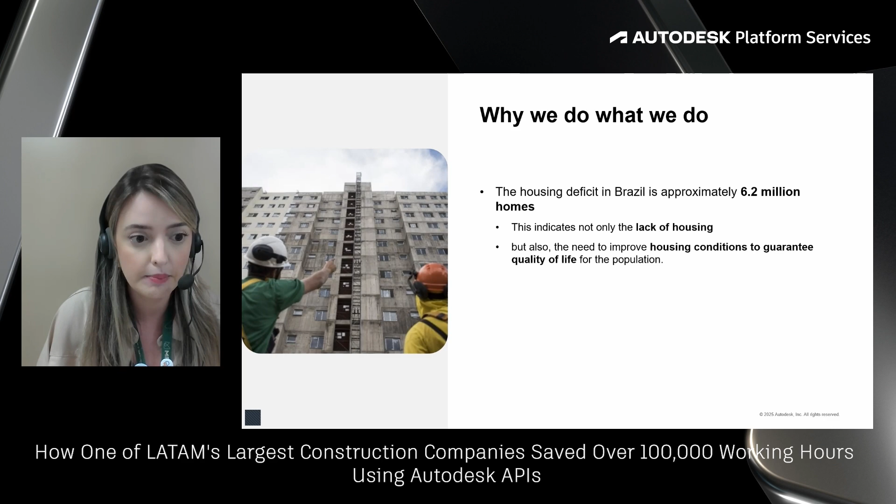Brazil needs over 6 million homes. Millions of families live in bad conditions. MRV's mission is not just to build houses, but to give people good, low-cost homes and better lives. We build the dream of owning a house. But building houses alone is not enough. We had a bigger question to answer.

We believe in the transformative power of a home. It's where individuals, families, and communities begin to dream, achieve, and shape a better world. Our brand reflects this commitment. We don't just build structures, we build dreams that change lives.

Founded in 1979, the MRV Group is now composed of 6 companies. Besides developing housing for Brazil's low and middle-income population, we also operate in land development, rental solutions, and we have a subsidiary in the United States named Resia. In addition to making the dream of home ownership a reality for thousands of Brazilians, we generate over 6,000 jobs annually in the cities where we operate.

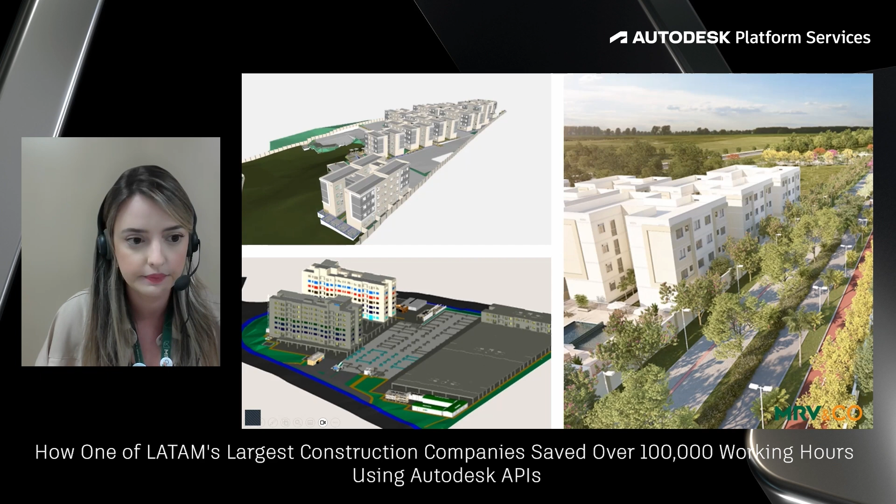We have a diversified product portfolio including low-rise buildings up to 5 floors, single-family homes, and high-rise towers up to 22 floors. Since 2019, all of our project designs have been developed using BIM. And we also use BIM to track construction progress on site.

To see our size: 500,000 homes built, 240 sites working at the same time in over 120 cities. Today, 1 in every 142 Brazilians lives in an MRV home. Of course, growing this big also brought new problems.

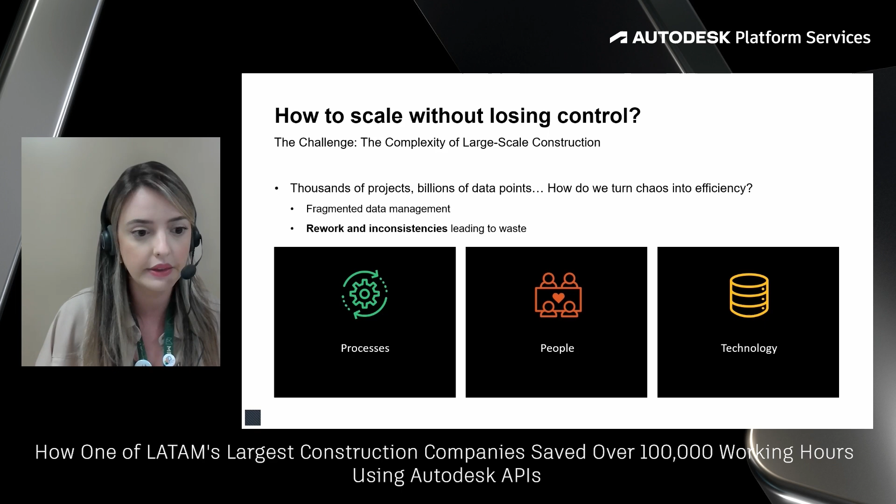Thousands of projects, billions of data points. How do we turn complexity into efficiency? We are facing fragmented data, inconsistent quality, and excessive rework. It was clear we needed a smarter and more structured way to operate. So we asked ourselves, how can we scale without losing control? The answer: well-defined process, engaged people, and the right technology to accelerate results.

BIM became the heart of our digital change. It gave us accuracy, standardized ways of working, real-time data, and strong teamwork. And with BIM, our decisions become smarter and faster. We moved from messy spreadsheets to smart BIM models. Now, planning, tracking, following rules, and managing are part of our daily routine.

Our workflow can be summarized as: number one, data-driven decisions. Unified models provide accurate forecasts and real-time insights for better decisions. Number two, precision and standardization. Integrated models reduce inconsistencies, minimize rework, and ensure quality.

Number three, active collaboration across teams. Improved information sharing and teamwork boost communication and project visibility. Number four, traceability and governance. All actions are logged and traceable in one source, ensuring compliance and quality.

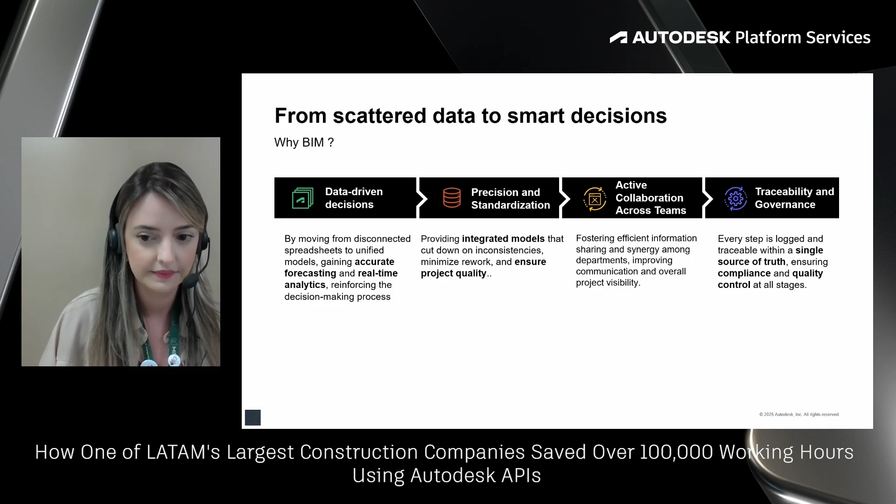But this journey wasn't easy. It all started in 2014 with the first pilot project. Each year, we've increased the number of projects and sites using BIM, while also growing our team and improving our maturity with the methodology. Each year, we got bigger and stronger.

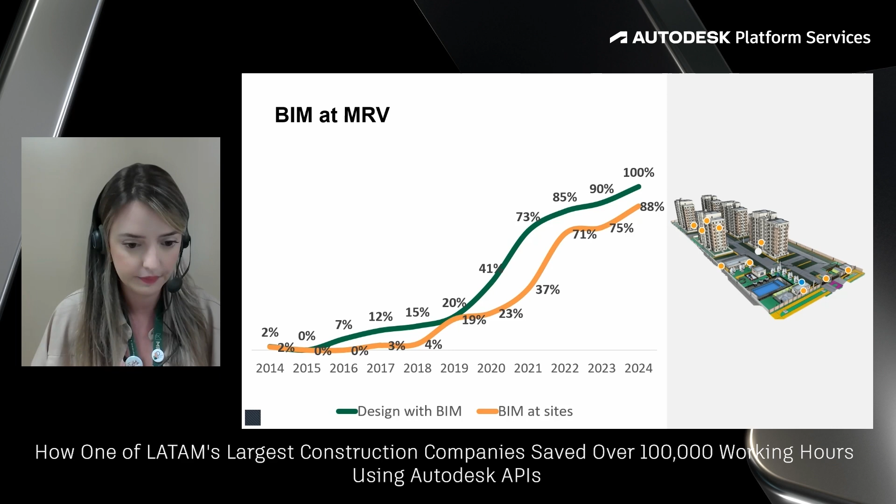Our BIM journey has now lasted over 10 years. Now we are 15 people dedicated. We trained over 2,000 people and handled 1,200 projects on Autodesk Construction Cloud. Still, we had to overcome many challenges along the way.

At the beginning, there was resistance to change and communication was challenging. We knew we had to show quick results to keep motivation high. We focused on change management, asking how can we foster a digital culture and adopt new technologies. Clear communication was the key. How can we translate innovation across all departments?

We understood the need for fast results. The challenge was, how can we show quick wins to sponsors and stakeholders? We set clear objectives with sponsors, created workflows to communicate results, and listened actively to teams to understand their needs. We also mapped process and requirements to ensure alignment.

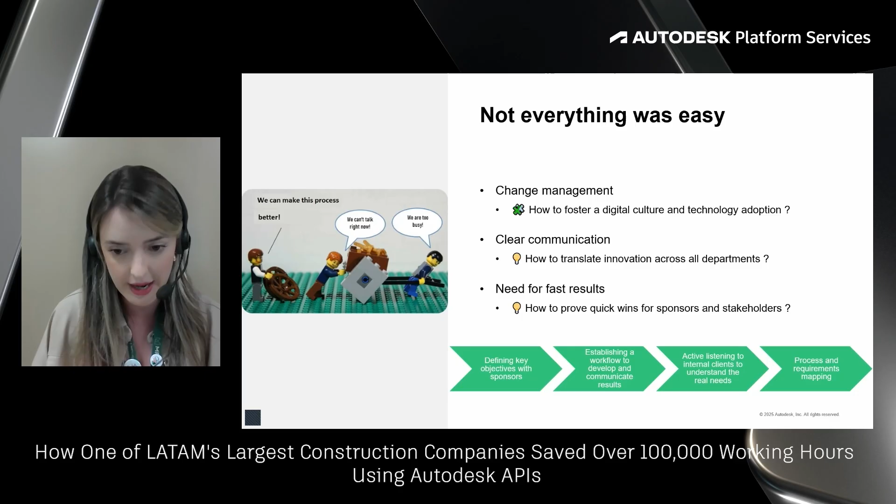Now it's Gabriel's turn. But how could we bring fast results with BIM and show quick wins to our sponsors? Through automation.

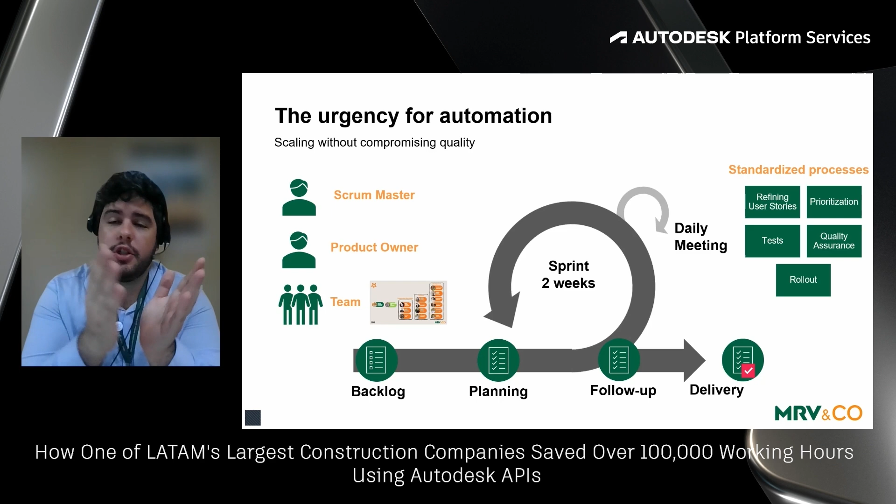This was one of our main pillars in the BIM implementation in MRV. To scale without compromising quality, automation became crucial for efficiency. We adopt Agile methods, aligning clear objectives with rapid delivery cycles, ensuring immediate results and long-term sustainability.

According to the Scrum methodology, we established key roles and rites to keep the flow and work in standardized processes. We established the role of Scrum Master, Product Owner, and the developer team. Each of these roles have standardized procedures and activities throughout our cycles, our sprints of 2 weeks.

Since defining the features and refining user stories in our backlog, to correct prioritizations in our plannings, to standardized development steps and rollouts across our sprint. The planning is the beginning of the sprint.

We go through the backlog to understand the needs of the clients, run refining processes, prioritizations, and across the whole sprint, we develop the product, test, provide quality assurance, and roll out it.

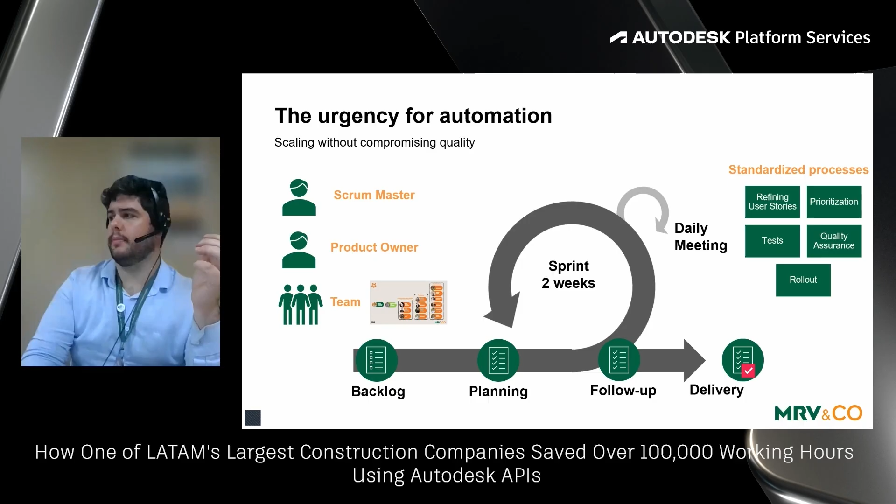Going deeper, to our team, we are right now 15 dedicated people in maintaining and deliver new processes and automation.

The process team has a key responsibility to be in touch with all the design teams, map and establish information requirements and needs of the other departments, translating to the development team these needs into new possible products.

And the dev team owns the expertise to create and build the automations. They have the responsibility to manage all the creation, test, and deliver of the new products.

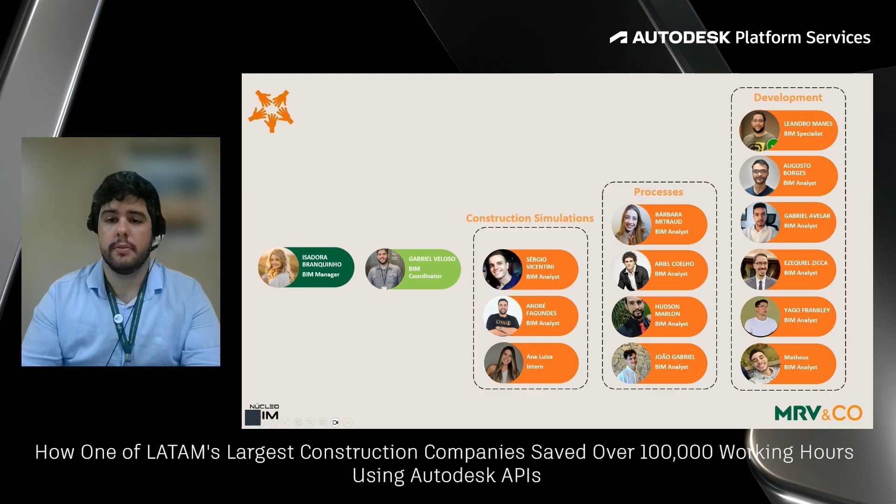Considering the whole development process, we established several activities that are key to ensure quality and efficiency to the process. The first step is establishing in the beginning of the year, in the beginning of each sprint, our process and needs mapping.

Aligning objectives and key results to establish our goals, the team goals, but also understanding other managers' goals and the whole organization objectives for the year to align the expectations with the other departments.

From these general objectives and mapping of the needs, we start defining the scope of new automations. We have a standardized procedure, standardized documentation to write down those needs.

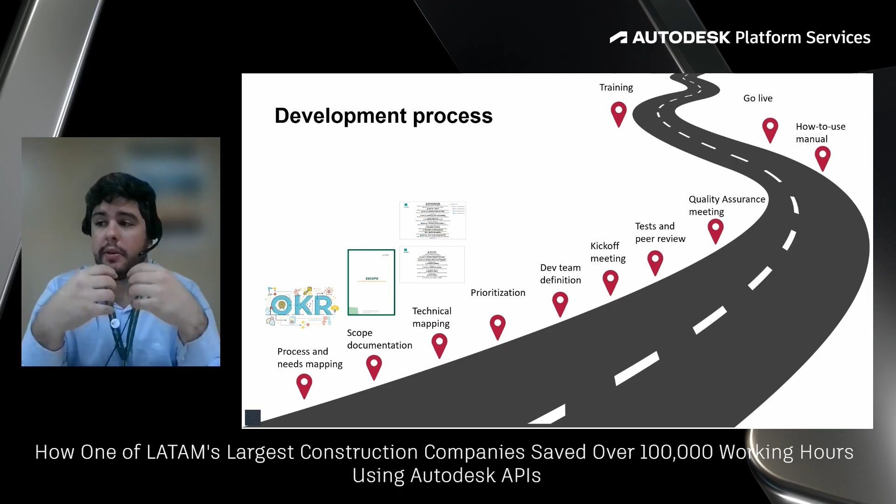From this scope, with the perspective of the business, we start a technical mapping, when our developer team bring their own expertise to refine the features and products with their expertise from the technical point of view.

If we go deeper in our technical mapping, we have several answers to respond across each level of refinement. We use Azure boards, and we have descriptions and answers standardized to provide for each feature and user story MVP that we're gonna make and deliver.

As an example, for this high level of feature structure, we need to well define the high level description of this idea or this solution. What will be new for this different product once implemented?

Who will use it? This is one of the most important answers. Who are the personas that will be used? How we're gonna reference them and bring the perspective of our internal clients to the product.

Why is it important for the user? How can we engage them in the process, and how can we engage them in using the product after that?

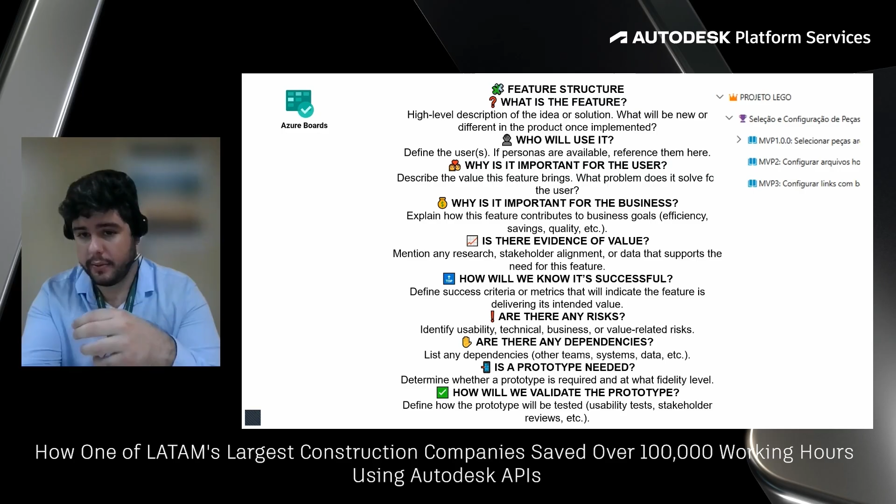Are there any risks? We need to map and manage all the risks throughout a project. Usability risks, technical risks, business and security risks, or any value related risk. Are there any dependencies with other systems, other products that we are developing, other teams, and so on?

And to prove the value, to understand how we gonna evaluate the MVP and so on, do we need a prototype to show the value, to understand how we're gonna build the product, and how we will validate this prototype if it needed?

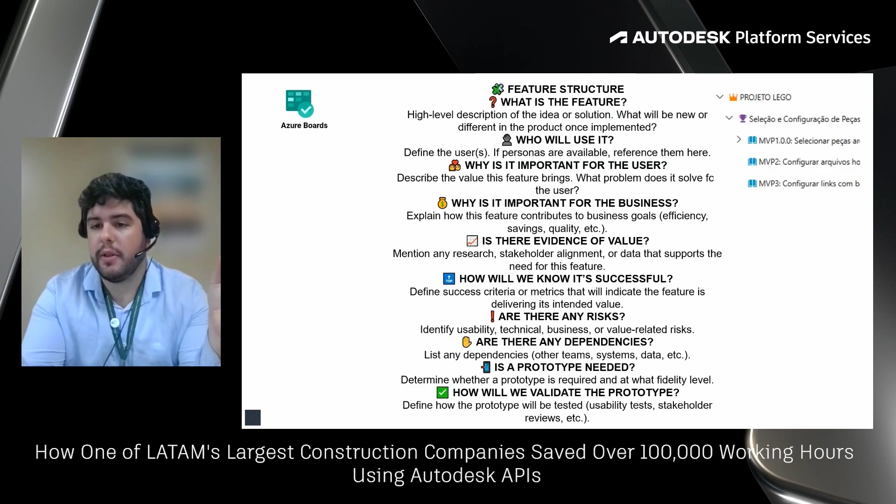In a lower level, we break down the features into user stories, which are our MVPs, which are what we prioritize and develop in each sprint.

And here we bring even more the perspective of the user, the persona that we need. As a key user, I want to use to automate this process to bring this value.

So again, we go deeper in understanding the pain points of our designers, our analysts, revisers, and so on to automate these processes. And again, understand one more time what are the benefits for the business to prioritize correctly the sequence of development of a feature.

Again, we need to bring evidence to support the development, list technical documents, insights, benchmarks, or related tools supporting the story.

Also, we need to understand the rules and acceptance criteria, defining functional rules and what must be delivered for the story to be considered done. Defining metrics and impact, KPIs or indicators that can be affected from the improvements this feature will bring. And also, we have technical details, system areas that will be impacted, maybe suggested tables or components to be created or modified in this development.

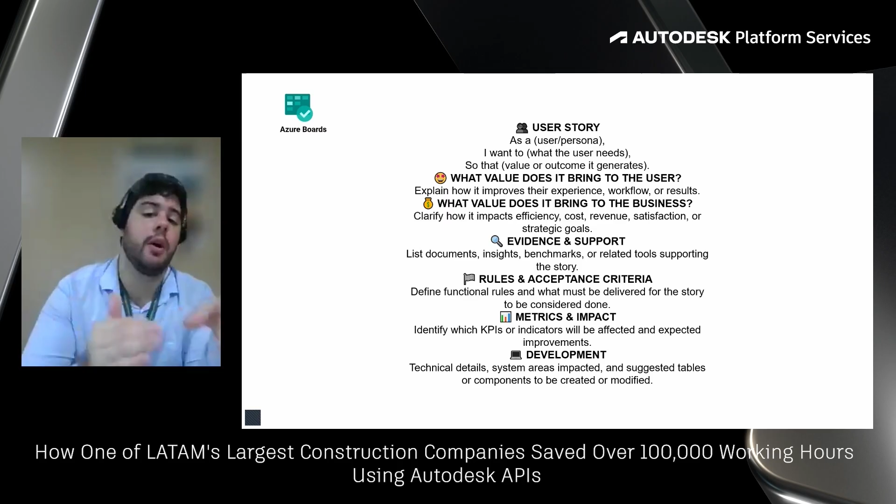So here are the answers that we have to write down before starting a new development.

With our scope documentation and technical requirements, we are able to do a correct prioritization in our plannings. We tend to prioritize what provides more benefit for our internal users and for the business, and of course, what is simpler to develop and bring quick results.

With the MVPs defined in our planning, we establish which dev team will develop each of those features and user stories. With this team definition, we have a kickoff meeting with the dev team, the process team, and other stakeholders to announce that we're going to start those developments.

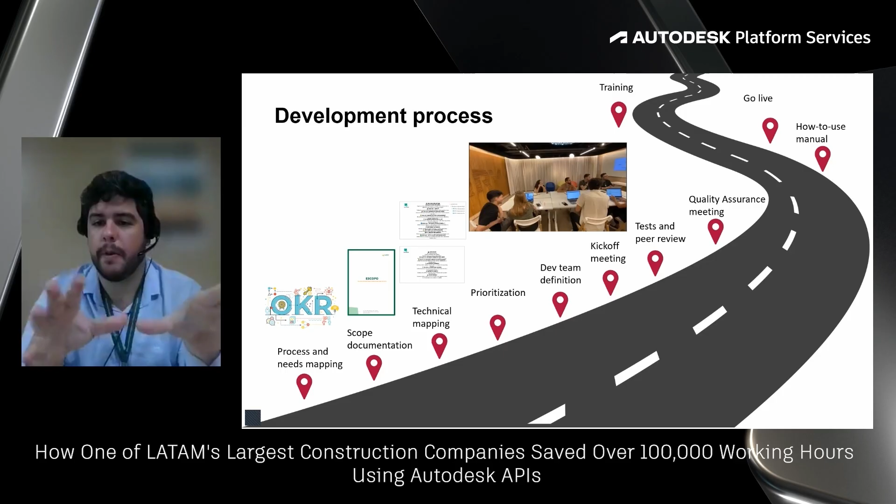And after the first development is done, we start tests and peer reviews inside the dev team. If it's all okay, we move on to a quality assurance meeting with the other stakeholders, our key users, to evaluate the development and validate that from a business perspective it's also okay, and that we are achieving the acceptance criteria.

With this stamp from the business side, we start the process to write down a how-to-use manual, bringing again the user perspective on how they should use that product.

With all these steps done, we publish the product in production, going live with it. And in some cases, we do specific training with the teams that will use these applications the most.

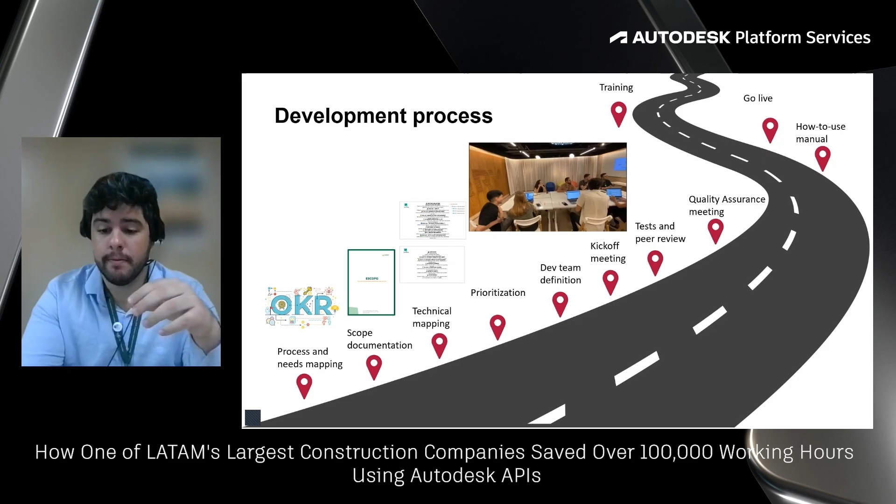Here, a small video of our team in our office, in our daily routines discussing ideas, and in a collaborative way prioritizing the needs and establishing the goals of what we're going to develop.

Here, our current number of uses of our products and the level of plugins that we already developed, which we're going to go deeper into in the following slides.

From this perspective of our processes, I'm going to tell a story, going throughout the roadmap over the years, showing you how we reached this point.

Going back to 2020, in our era with no ChatGPT, way less tutorials, we started our journey with only one dedicated developer, and also Jeremy's blog to guide us through this whole sea of the Revit API.

At this point, it was the beginning of everything. We didn't have standardized procedures. We were discovering the way that BIM automation could bring benefits to MRV. In this year, we already developed over 10 plugins for Revit.

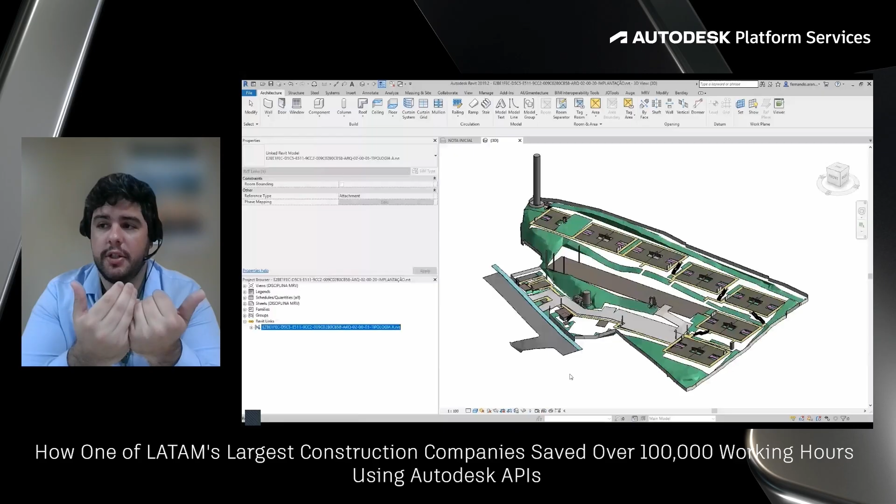As an example, here one automation that we developed back then. At this moment, we ran commands in Revit that were working with simple geometry transformations and simple calculations, simple user interfaces, as you're going to see in this plugin, using Windows Forms, exploring the potential and showing quick results.

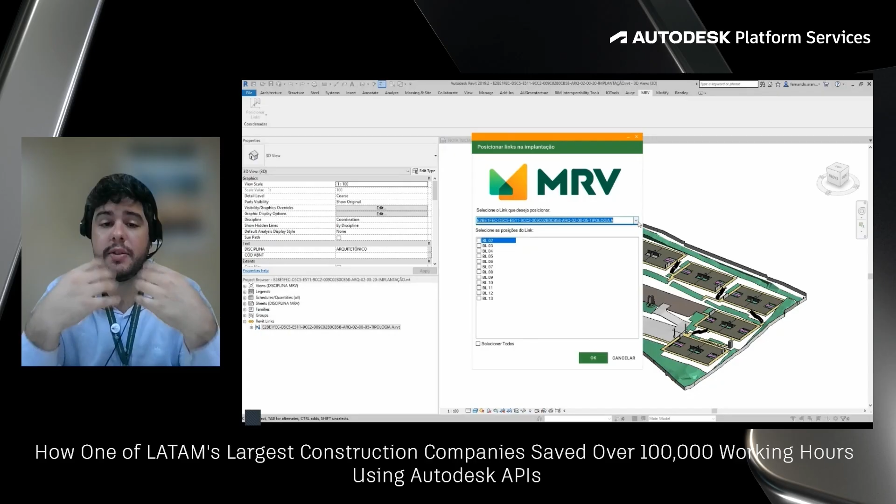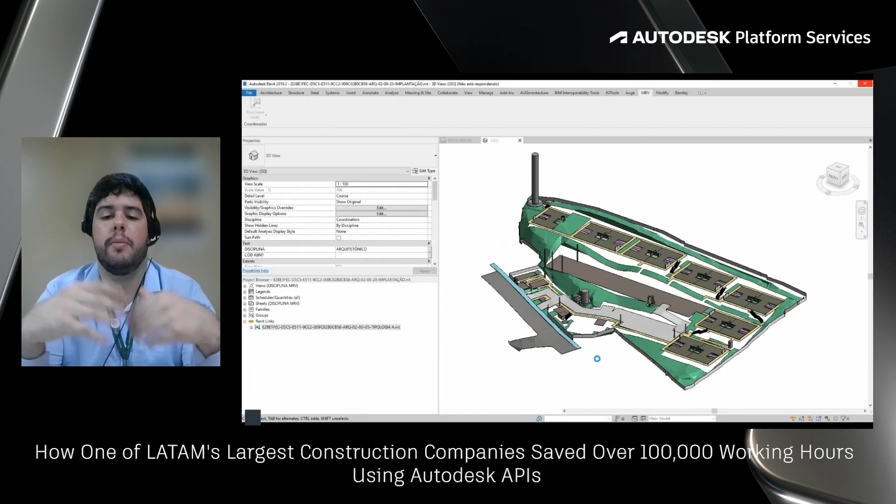In this case, we have this plugin, which selects a Revit link type and its positioning on site. We used to use a small Revit family to define the references on site, and with the project base point of each Revit link type, we managed to calculate the positions that each Revit link instance, representing our buildings, should be positioned on site, as you're going to see after the calculation of the coordinate transform.

In 2021 and 2022, after showing the possible results and capabilities that we could bring with automation, we started establishing workflows and proving the value of these functionalities. A key point of this milestone was to increase productivity of the team, establish those workflows, and bring better results.

One of the main aspects to prove these results was to start collecting logs to understand the usage of our plugins. We could assess that over these years we had 37,000 uses for those plugins that we were starting to develop. With this data, we could prove the value that this team could bring.

So we could, with our sponsors, increase this team and start new types of developments.

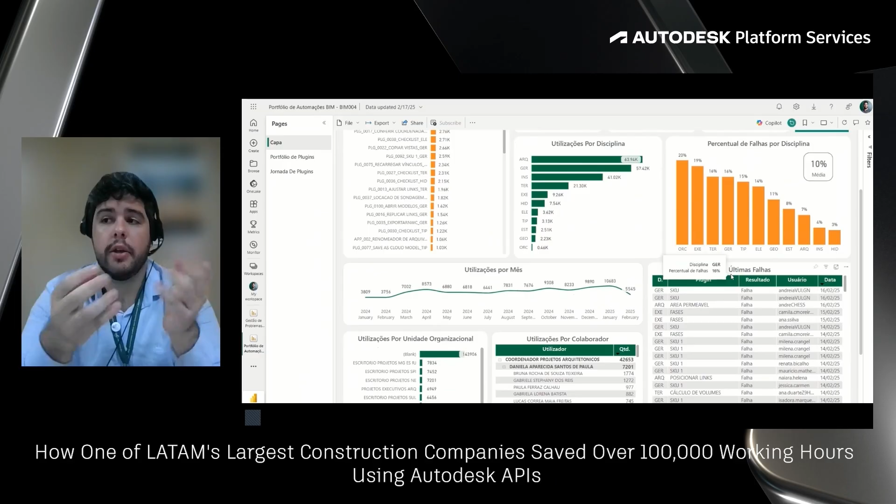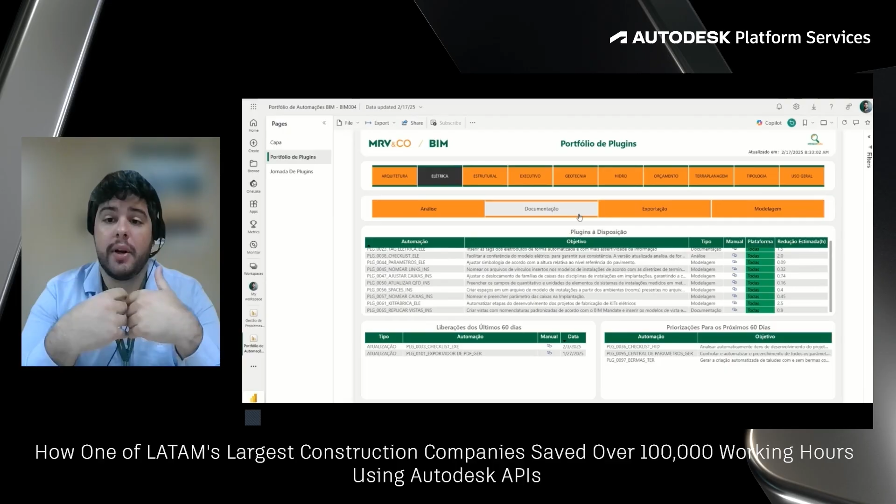As you can see right now, with this data from the logs, we could manage to develop a Power BI dashboard in which we could analyze the automations that were being used the most, the design disciplines using them the most, and the possible failures. It was also a huge portfolio of our automations, in a way that our users inside the company could see the whole package of automations available to them, and it showed them, at each step of the design, what type of plugin they should use at that moment.

So here we could increase our capabilities to generate insights for our prioritization and generate metrics of the uses that could guide us throughout the years, establishing the path that we should follow to increase our usage.

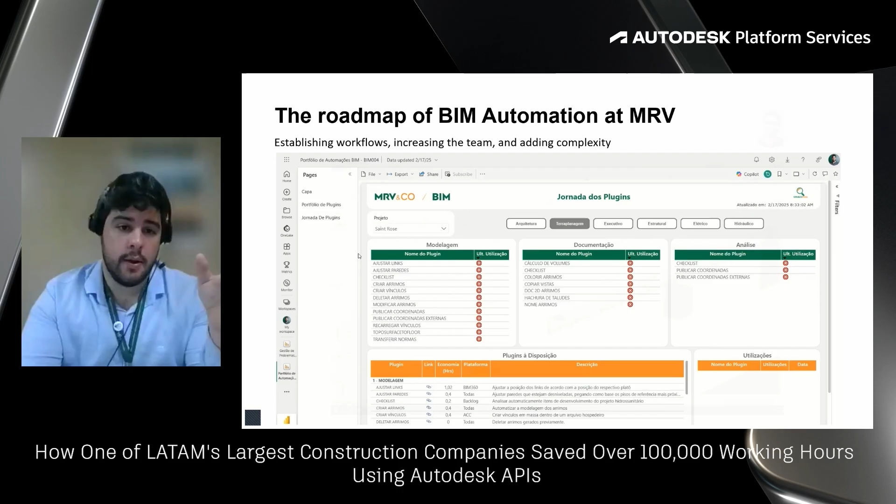At this time, we also increased complexity in our plugins, from the commands themselves inside the Revit API, but also from the user interface perspective, bringing new technologies, organizing the code architecture, and increasing the complexity.

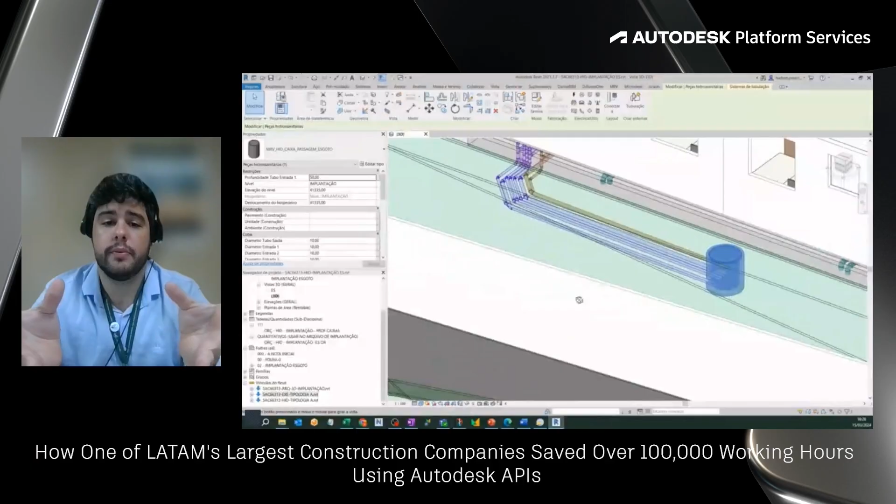Here in this example, this plugin enables a calculation to define the optimal path to connect pipes and plumbing equipment on site, respecting internal technical definitions and national standards.

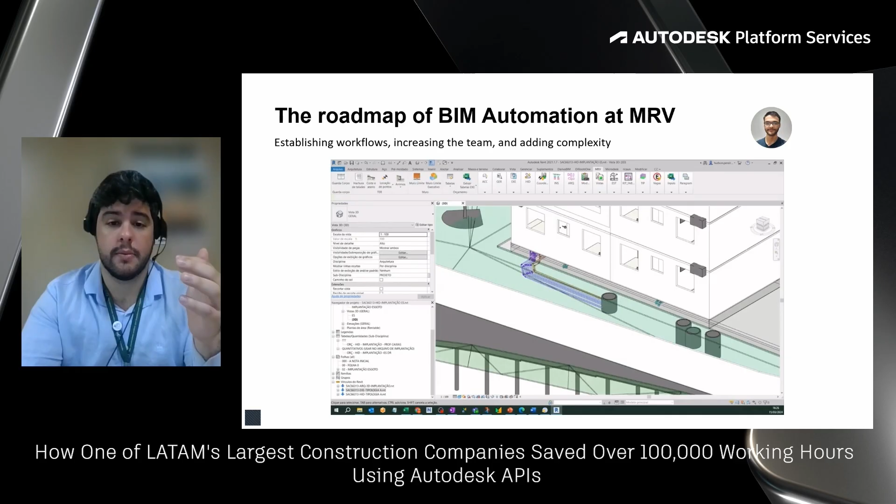Another huge milestone for us was in 2023, the migration to Autodesk Construction Cloud. It enables us to start thinking about a new set of capabilities to our automations. The migration of our projects to a cloud-based solution, such as Autodesk Construction Cloud, enabled us to run data extraction processes across multiple projects. As Isadora already told, we have right now over 1,000 projects in ACC. So imagine the volume of data, and this capability brought to us a huge set of opportunities.

Another perspective is also it enables us to connect communication workflows between Revit and our common data environment. Therefore, to achieve these objectives, we had to develop technical skills on the Autodesk Construction Cloud APIs, increasing the complexity to our developments and enriching them with new commands.

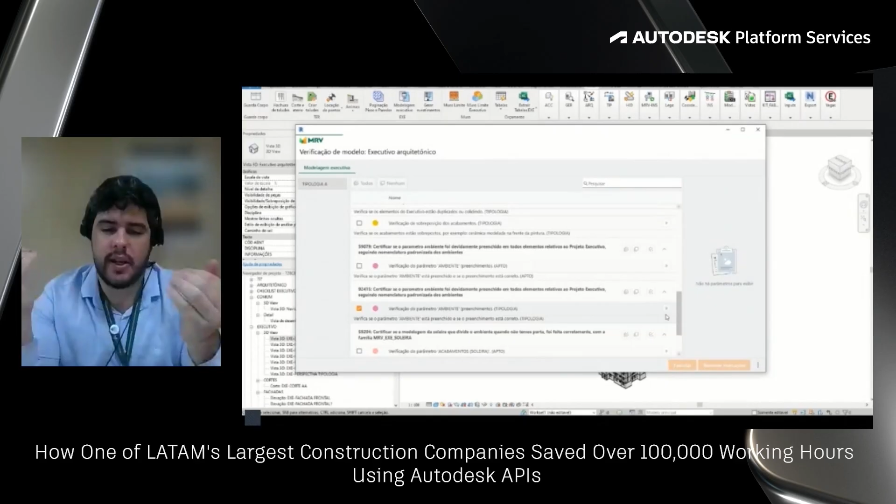As an example of this type of development, here is a plugin for Revit that runs model checking processes. It runs a set of verifications inside Revit according to our company standards and national regulations. Inside Revit, it generates a generic model representation of the issue, carrying data of the problems and items that we identified.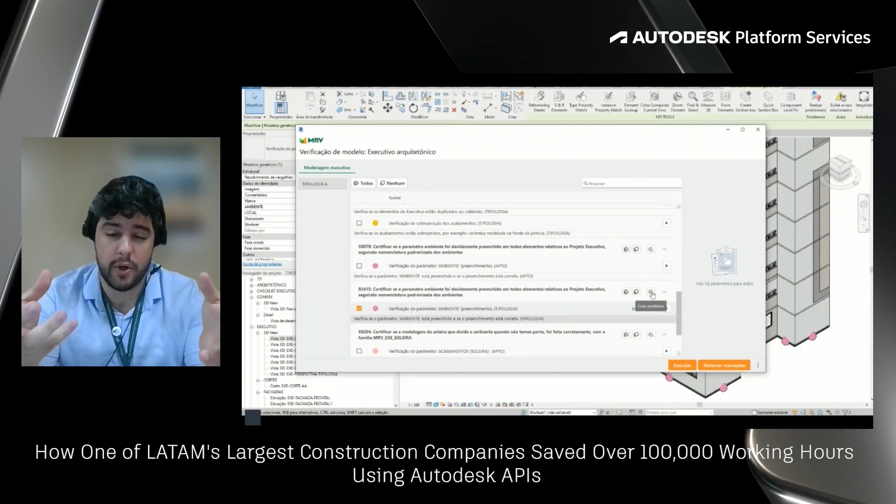Providing a 3D representation for the reviser to check this data inside the Revit model, but also enables a direct communication process with the designer, creating in real time an issue in ACC with exactly the same data that the plugin generated inside Revit, filling up all these fields automatically.

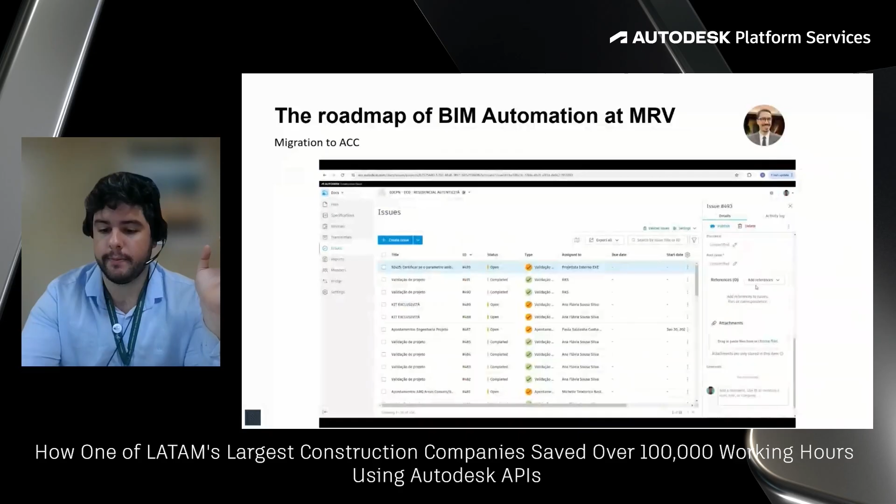In 2024, looking back to this last year, the key aspect was to build robust applications using multiple Autodesk APIs. At this moment, our products were already well established in the company, and we tracked the most amount of users. Back then, more than 170,000 uses, over 90 Revit plugins. The team had increased again and gained a structured format. So we took courage to start getting out of Revit, also developing much more complex applications.

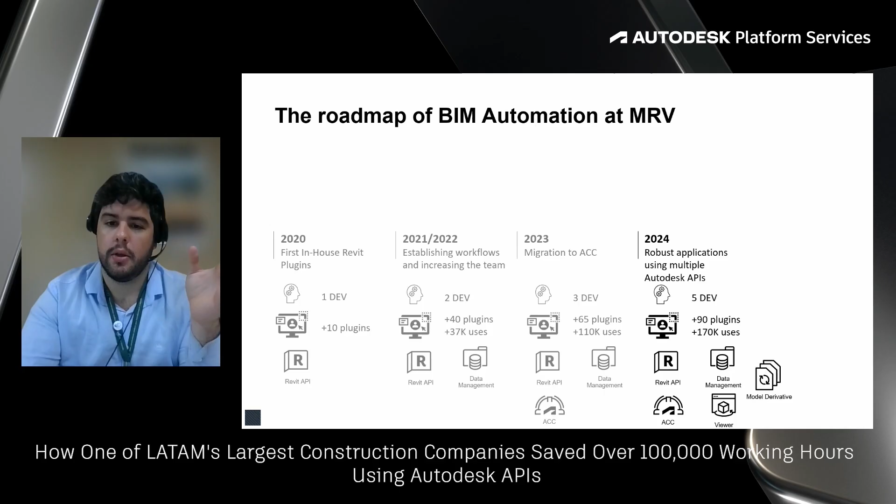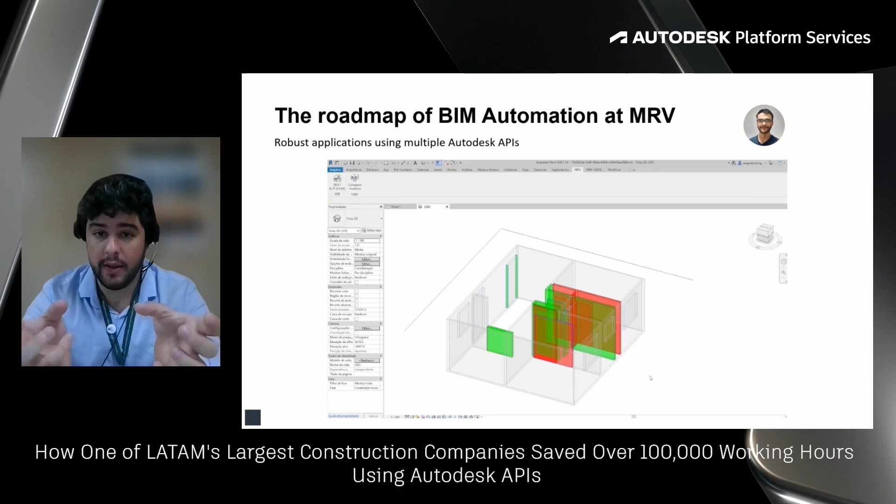As an example, yet inside Revit, here is a plugin that compares multiple projects at once, multiple designs. But here, what is the key aspect? We are not comparing the Revit models itself. We extract the data, the geometry data first from Autodesk Construction Cloud, our models hosted there, with Model Derivative and the Viewer API to regenerate this geometry and calculate the differences between projects inside Revit. So here we are only using the geometry engine inside Revit to optimize this process.

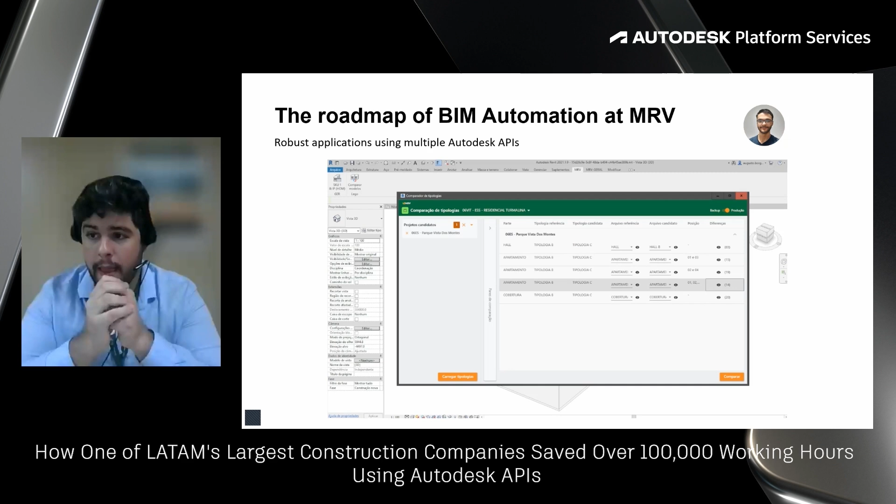But why do we do that? Because it's much faster than opening several projects inside Revit, and the velocity here was the main factor for the company, for the business. We have over, again, 1,000 projects, and one of the main issues for the company is to keep the designs as similar as possible, because our construction method requires similar designs considering our concrete walls. So this process enabled a comparison of geometries that used to take hours to run in under a few minutes. Here we can compare multiple projects at once.

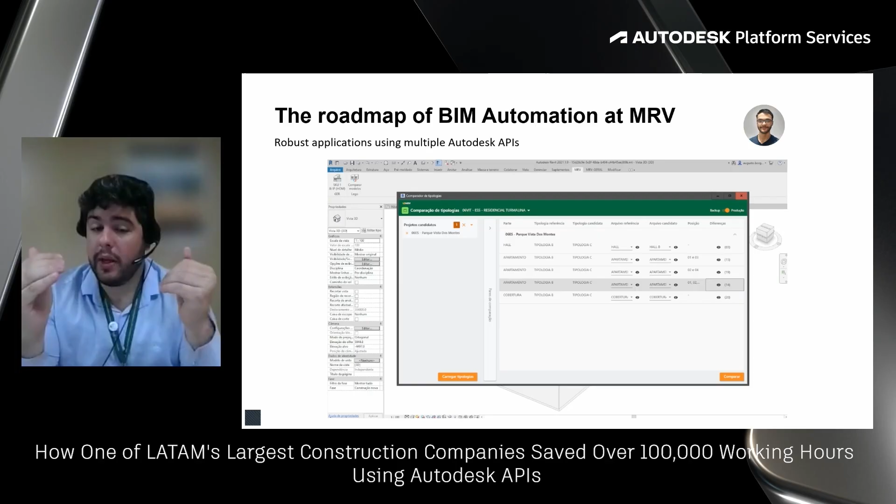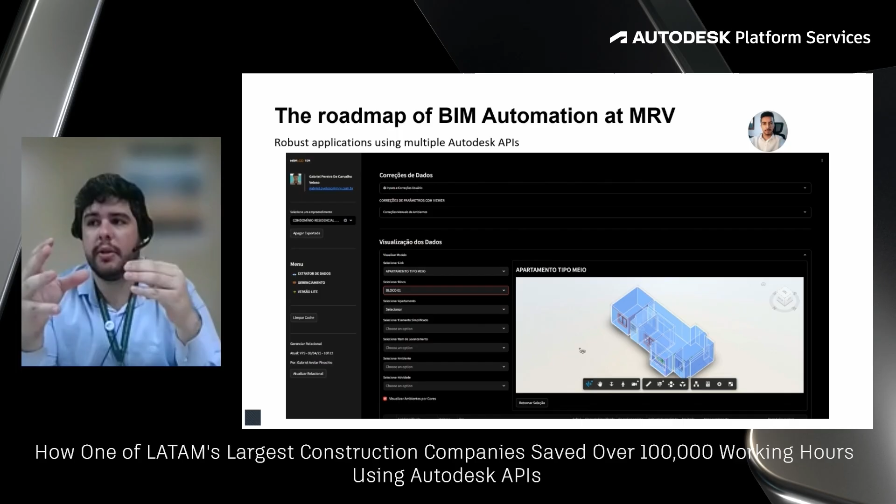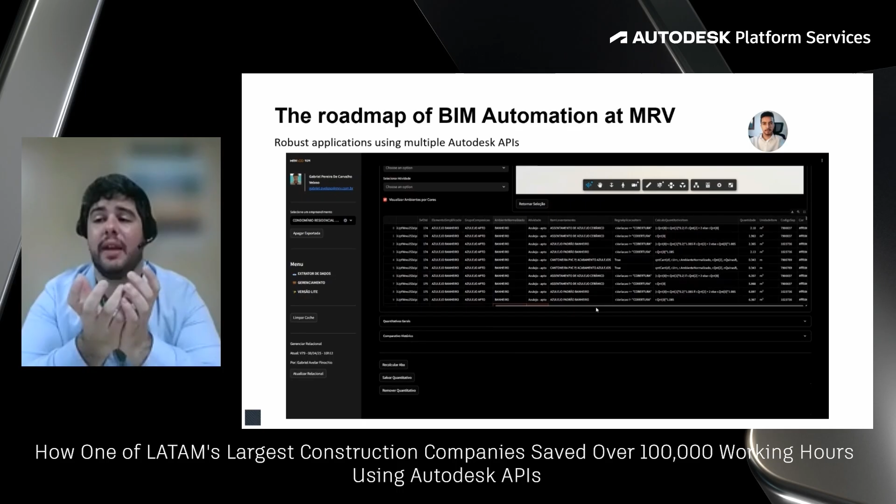And now an example getting out of Revit. One of our major developments last year, a web application built with Streamlit and Python in the backend, with the key objective to create an automation that connects design and budget through the quantity takeoff. Through the Model Properties API, it extracts the model data in the backend, and it connects to the budget compositions automatically. To bring the visualization of the whole process, we use the viewer.

This visualization aspect brings assertiveness and confidence to our stakeholders, people on site, the designers, the budget team, to be secure to use the model data with assertiveness and being sure of the quality of the data used in our budgets.

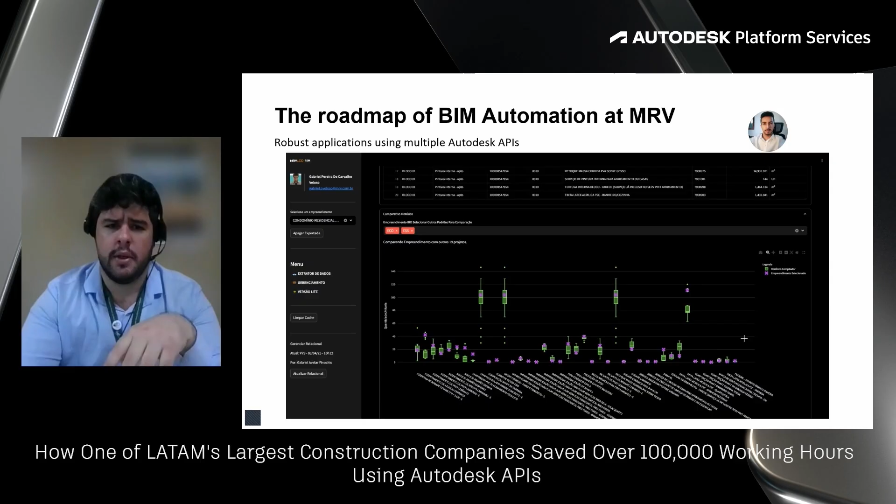So we navigated throughout the 5 years of BIM automation at MRV, our main milestones. Today, we are proud to showcase over 200,000 internal uses, over 100 plugins for Revit delivered, 5 web or desktop applications, which helped us save more than 100,000 working hours. These results underline our commitment to efficiency and continuous improvement.

For the future steps, we continue to expand our horizons, integrating more sophisticated Autodesk APIs like Forma API, Autodesk Data Model, and Model Coordination API, with the focus in reshaping the construction industry, driving efficiency, quality, and cost reduction.

With the Forma API, we believe that we can achieve design and analysis processes in early stage of site evaluation with more efficiency. With Autodesk Data Model, we believe that we can even more enrich the model analysis and data comparison processes across multiple projects in the ACC Hub. And with the Model Coordination API, we believe that we can drastically optimize clash detection processes in this huge environment of projects.

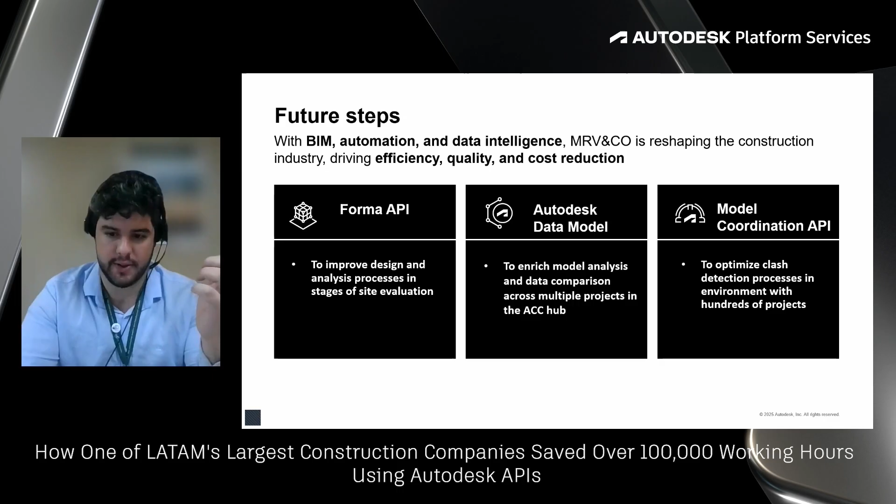Closing out this presentation, again, innovation for us isn't just about technology. It's about transforming how we build, especially focusing on standardized processes that can bring long-term sustainability for our solutions, investing in people and enabling talents that can bring several technical skills to this whole process.

So the main point of this presentation is not to talk about trending topics, hype, or any kind of automation itself, but show to you a solid path that we went through achieving these results. Thank you for your attention.